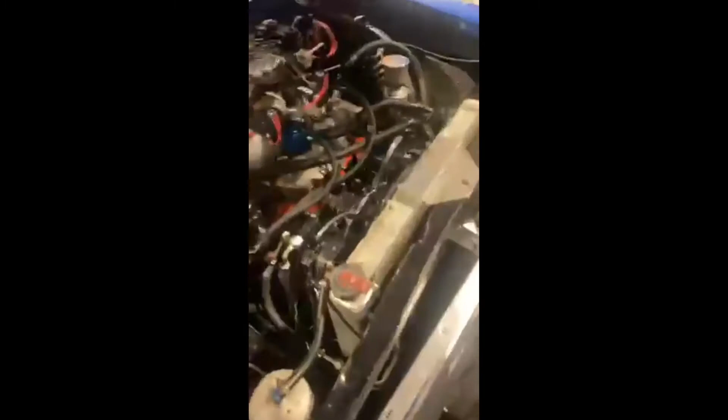All right, here's what we got going on, y'all. Everybody wants the queen to run on motor. They don't want the queen to turn the nitrous on. So we're gonna pull the nitrous kit off, and there's some kind of little aluminum spacer thing.

Brian, tell them what Gary Williams... y'all know Gary Williams, he's crazy as a bat, but he's got all these special reversion plates and stuff that he runs with his carburetor, and he swears by it, that you got to have the plate on it. We're getting ready to find out firsthand. We're gonna test this theory, and I'm betting with the old... what do you call him? Old roughnecker, that's what Gary Williams is. Old roughnecker, yeah. He definitely a carburetor man.

All right, we're gonna get ready, y'all. We're gonna put that little aluminum spacer on it. I'm gonna get it and show it to y'all, and we're gonna put it on there, and then we're gonna see what kind of difference it makes. Let me go out here and get it. Hey Smollian, grab me that little aluminum spacer and let's check it out. Let them see it. We're gonna see what kind of horsepower, that way you know.

This is what we got right here. Them ain't the brand new ones now. Where's that carburetor box? Bring that carburetor box in here. Do we got the carburetor box, y'all? I'm finna show y'all, hold on.

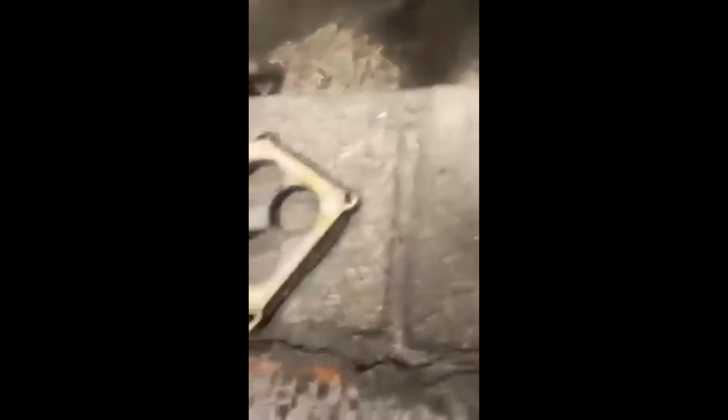Open it up, baby, see what it's saying, aluminum. Here's that little plate, y'all, that he's talking about. That's it, Gary Williams swears by it. We're getting ready to see what it's gonna do, y'all. Gary Williams trying to tell us, he's trying to say that it really makes a difference.

And y'all know me, your mouth will say anything. You tell me something, I'm gonna find out. Win, lose, or draw, we gonna know, and the whole world's getting ready to know if it's gonna make a difference.

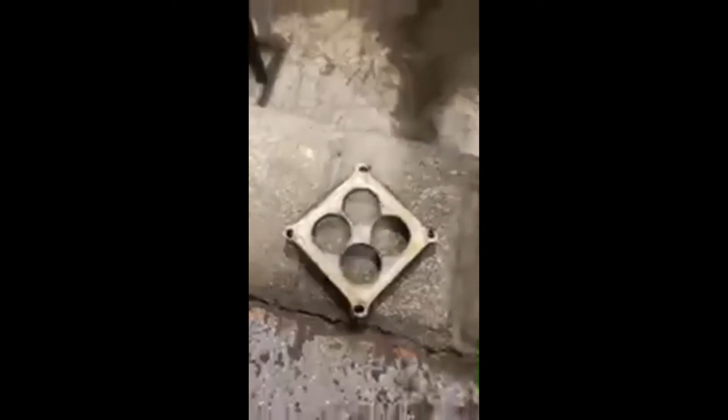So, what we got there? Ooh, got an E85 carburetor too, y'all.

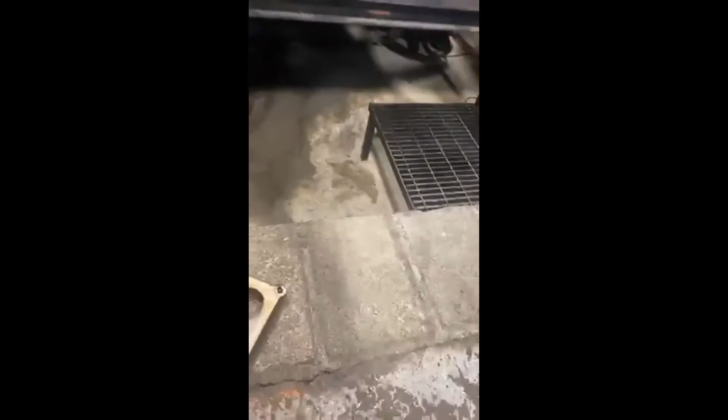All right, now I gotta be fair with him, I can't cheat, Mr. Gary. Which one will you need to use? Huh, Brian, come on, figure out which one we need to use.

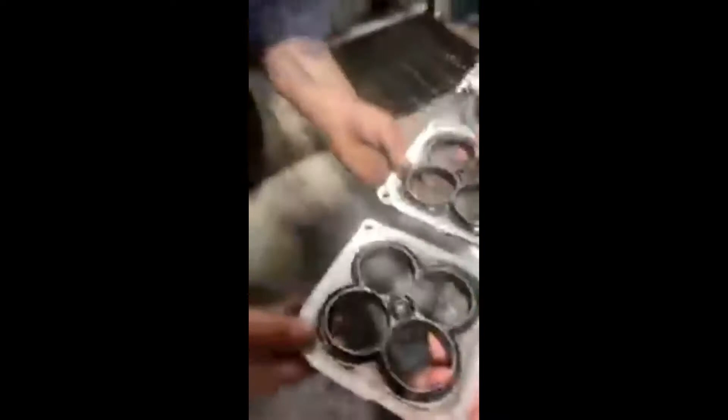One of them is for my 1200 carburetor that I bought from him. Did he give you one specifically for this carburetor? Yep, but I don't know what I did with it. They're identical that way, they're both reversions the same. Are they? Well check this, measure it like that.

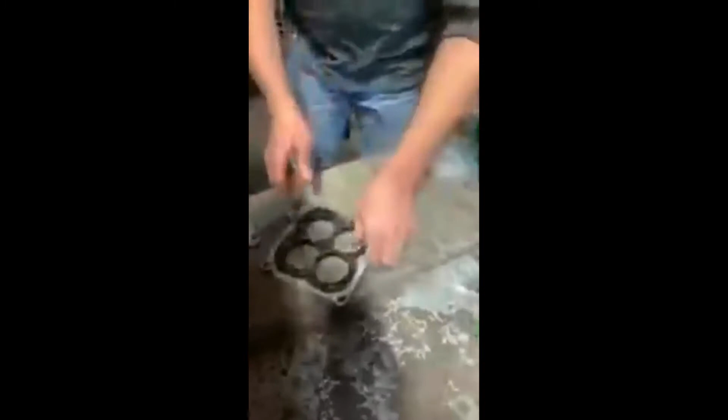Yeah, now normally Gary's got a second, there's two plates and they go together. What are you missing, Brian, the other one? No, that two-plate one. No, normally there's another piece. Smollian, I got some more plates somewhere. As in where? That's just one spacer, there should be two, there's more, another piece that goes with this.

These are the same, yeah, these are the bootleg ones y'all, I brought these from Memphis. Man, they must gonna leak. No, they don't leak. I got a pocket knife. No, I got a gasket scraper. So we'll use this one, it's a little more cleaner, yeah more clean, we need some Scotch-Brite.

All right, so that's what we're getting ready to do. This been hot, put that on there and see what it does, if it makes a difference. So we're gonna jump back on there and we're gonna dyno it, we're gonna take it.

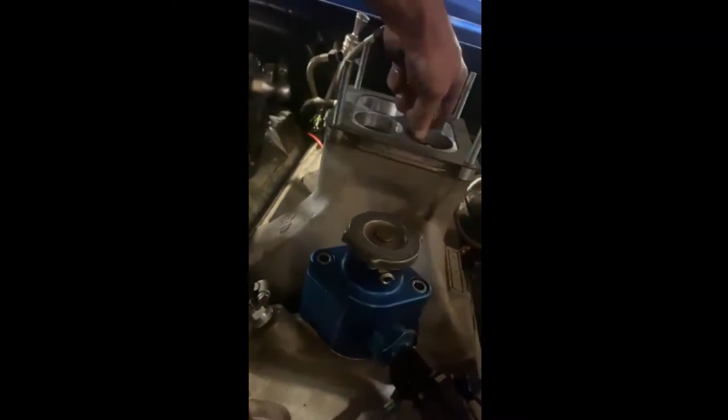We got Gary Williams' little reversion plate. It's a special made spacer he makes, billet aluminum. Supposed to help pick up the booster signal on the carburetor, make everything work better. If that works, we're gonna go take our ProCharger cars and put one on it, Axe. I think we can fit one on there. You'll get one on there regardless. A big one like what is it about?

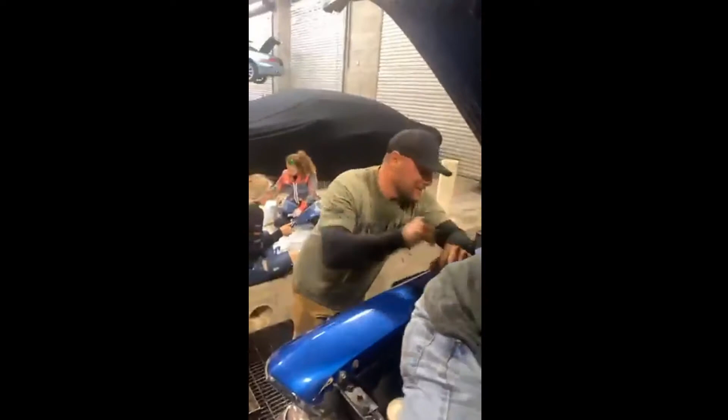Shit, if that makes a difference, we'll just go get a nut and put a nut on there. Put two of them on there, right? Yeah, we'll figure something out.

I dropped this one right there. What's going on, Brandon Lewis? What's going on, Hunter? What's going on, Stacy, Michael? Let me see that light. I dropped my one, I got it right here. What's going on, Jonathan? Brian Norville, we out here in Vegas tweaking on the little Chevy II. One there, it's my side. Oh, I'm not putting it over that carburetor. Yeah, let me put it there.

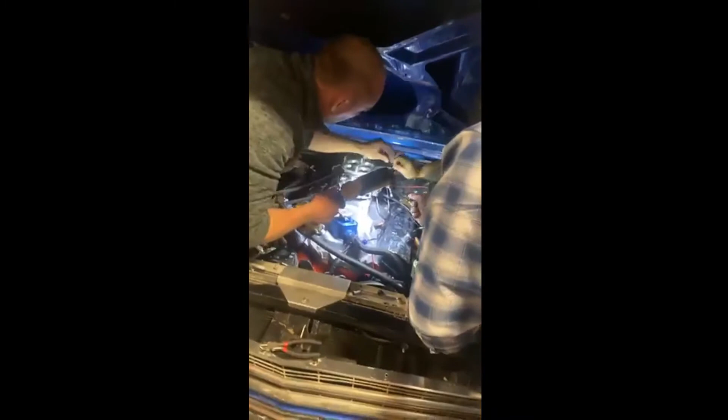You see, I couldn't even say it fast enough. I was like, might as well just react. Hey man, that wouldn't be no fun. I don't want to be that guy. You gotta dance with the devil every now and then.

Precious, look up here. She turns into an English bulldog at night. She gets in a race car, she turns into a queen, y'all. Axel, you don't think that's funny, do you?

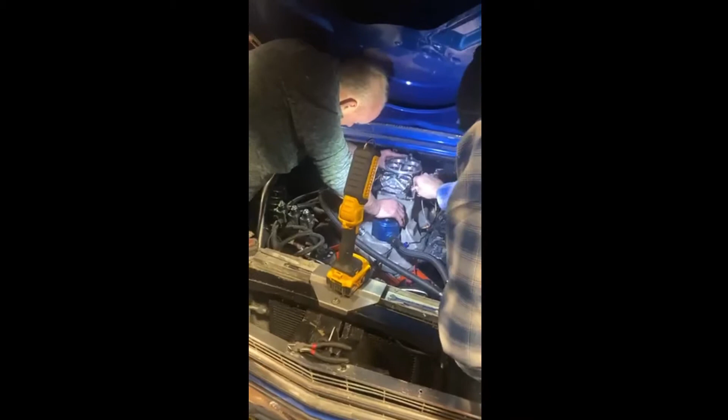Okay, we seeing what Gary Williams got going on. He's saying it makes a difference. Be careful of that down throttle, we fought with that down throttle. Need a clothes hanger on that.

Queen, when they get through, you need to get in there and make sure it's getting full throttle.

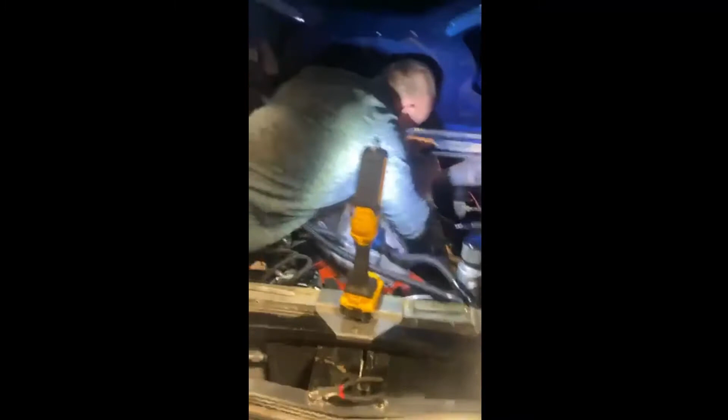Oh, I gotta have our hat. Here it is. What's going on, Jamie? Put this here. Rebecca? Kentucky? This a damn socket. What's going on, Mike? Keystone? Uh-oh, somebody calling.

Boy, if you bring that Trackhawk up here, we're going to take this Chevy II and gap it. You seen how much horsepower we made on the dyno? We ain't make but 575.

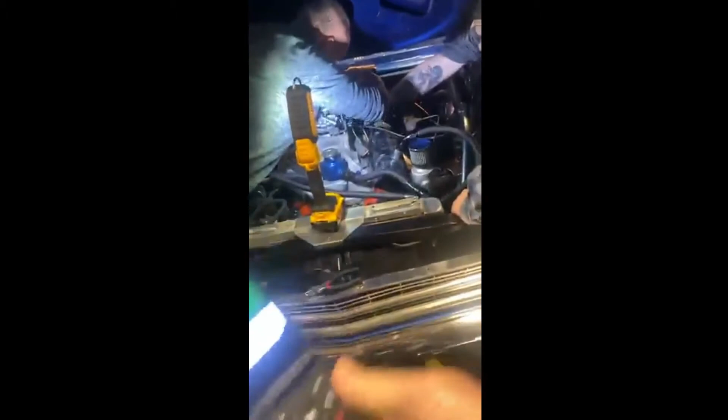So we get through here, we're gonna let Axe flag it. How you gonna flag it, Axe? Everybody gets 5, everybody gets 5. We're gonna run that track hawk, see if this 575 is gonna be able to do anything with that 900. What do you think, you got it on point? Yeah, I think we got her tuned up, man.

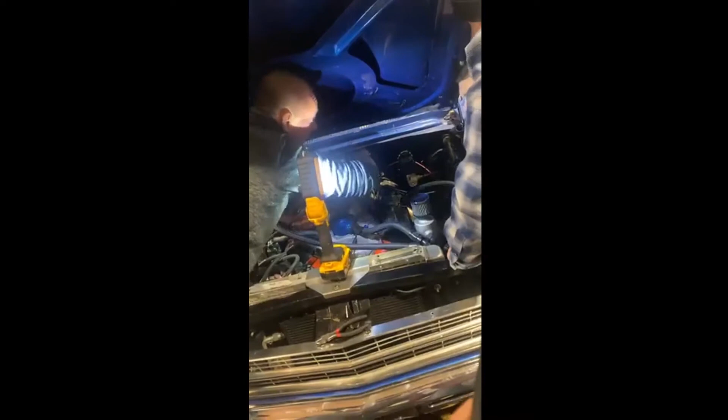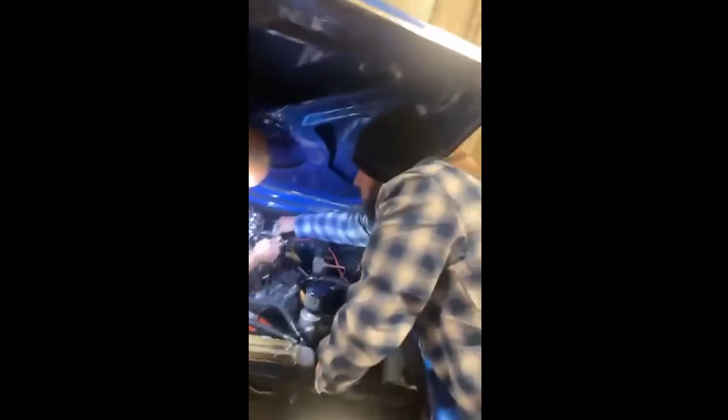Them boys in Texas, they've been working on the Trackhawk. They put it on E85, put a cam, headers or something else. And we've been here bootleg working on this Nova, so it's getting ready to be a drag race. Old school versus new school.

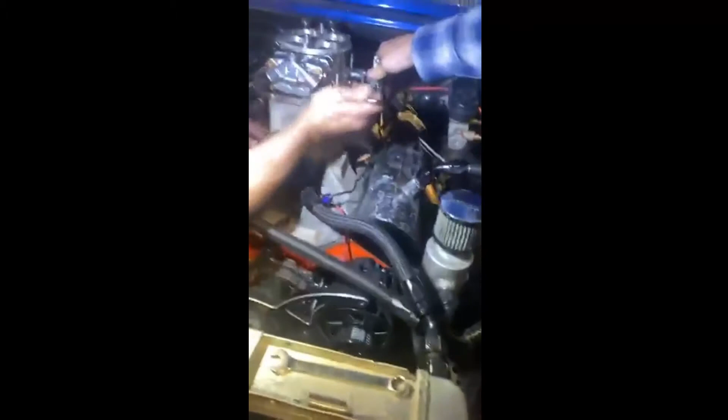If we lose, we're going to all dog pile Brian and Brett, they can't handle it. I got your back, Brian. We all, what's going on, Billy?

We'll stack up to a full size adult. That's right, me and Brett together, we make one person.

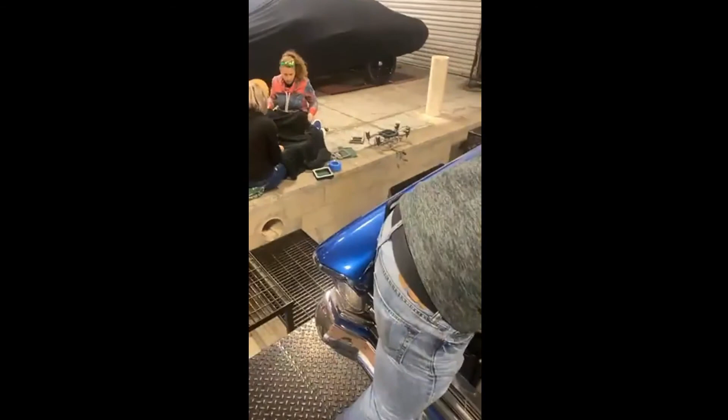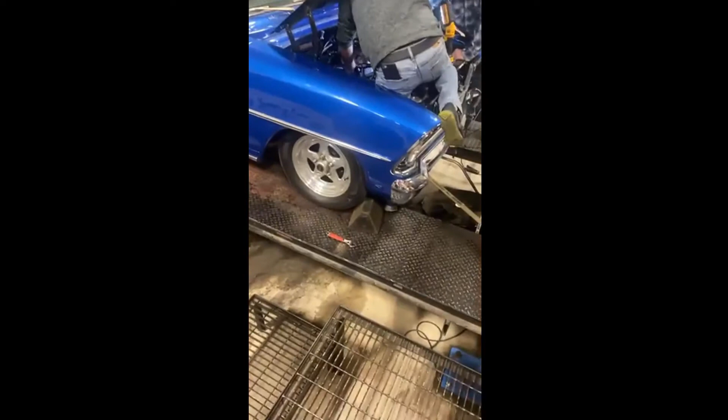What's up, George? Donald? What's going on, Joe? This was crazy. These weirdos.

Chelsea, come here. Come here, girl. Come here, Chelsea. That might not be Chelsea, or she'll try to eat the cans.

I don't know what Sassen got going on, y'all. Get ready to make a pull. Y'all just get ready, they getting paid by the hour.

All right, I'm going to let them finish it, then I'm going to jump back on here when we get back on the dyno. Here in just a few minutes, we're going to jump back on the dyno and see if the little spacer or whatever done the deal. I'm going to come back on in just a second, y'all. Rolling.

Here we go, y'all. We took the nitrous plate off and put the little spacer on there to see if it makes any difference. But in Gary Williams' defense, I think there might have been another spacer. We ain't for sure, but we're going to try this.

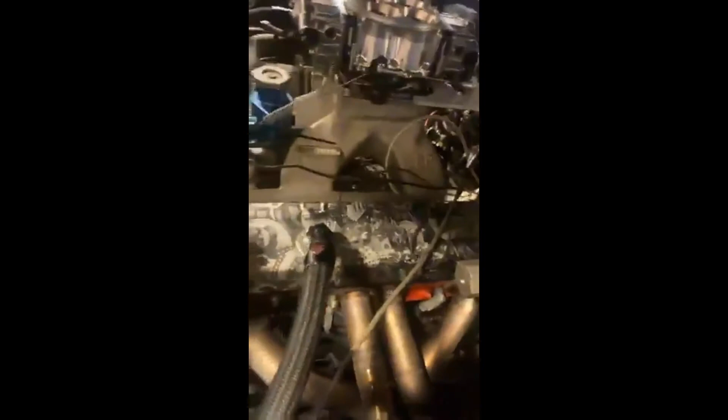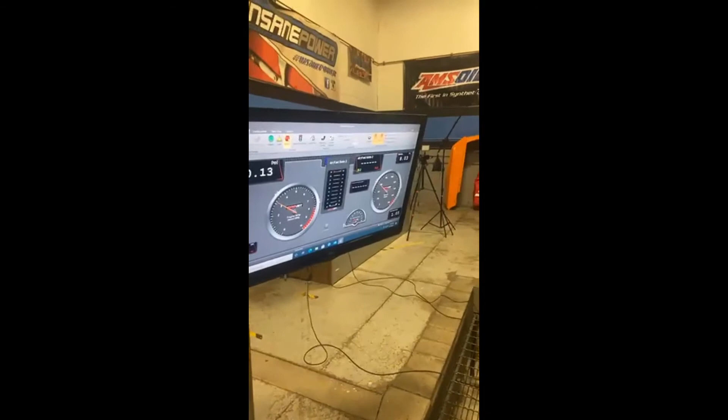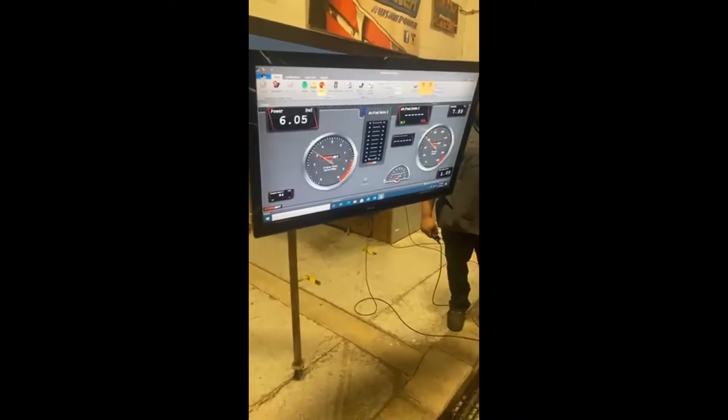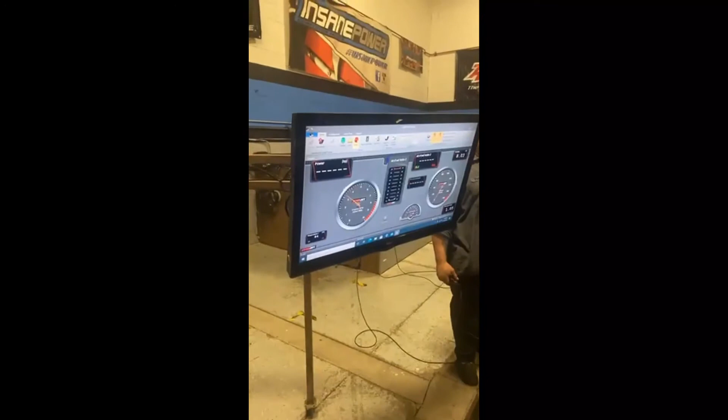Up a little bit. Here we go. Fix his hair. Here we go.

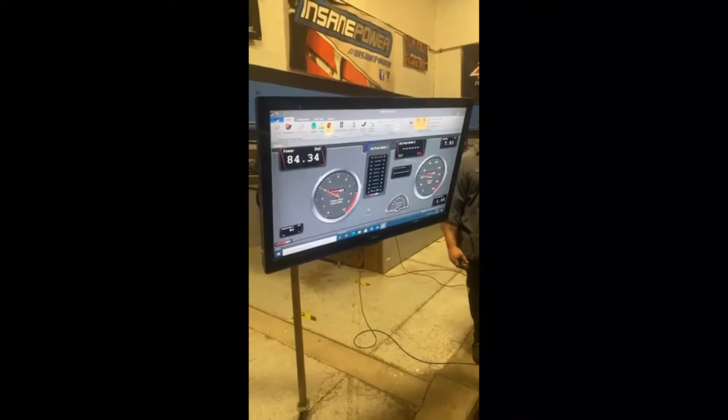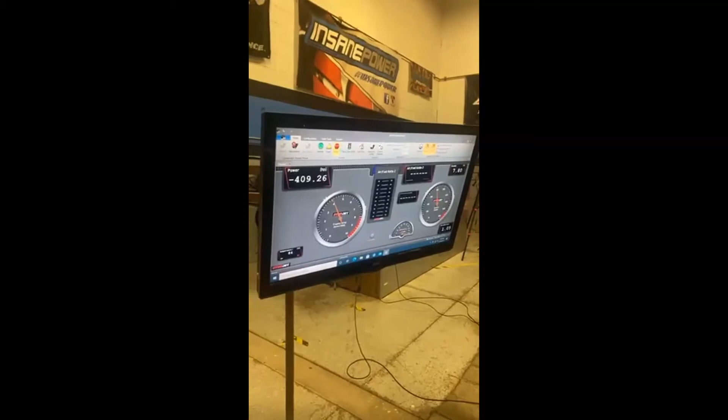Woo! That old crazy looking man knows something. He's a smart mouth joker, he's arrogant, he's an asshole, and he charges 3 prices. But I'm going to tell you what, it is what it is - I got to give him credit. 25 horsepower, just like that.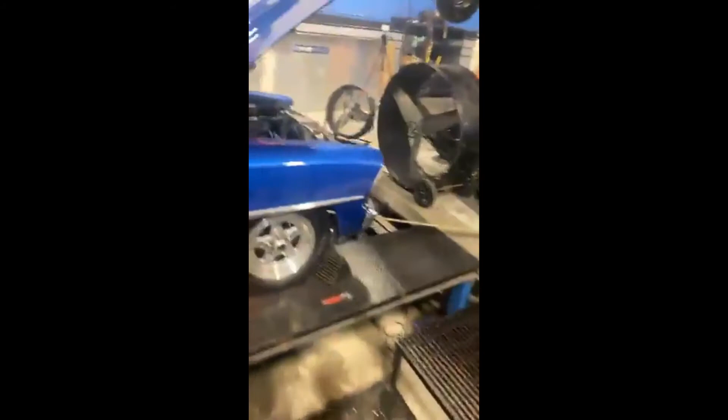That's what I said, he talks all that old trash. We put it to the test. Y'all seen it, all we done is we took the nitrous kit off and put a little old jack leg plate that he told us to put on there, and it picked up 25 horsepower.

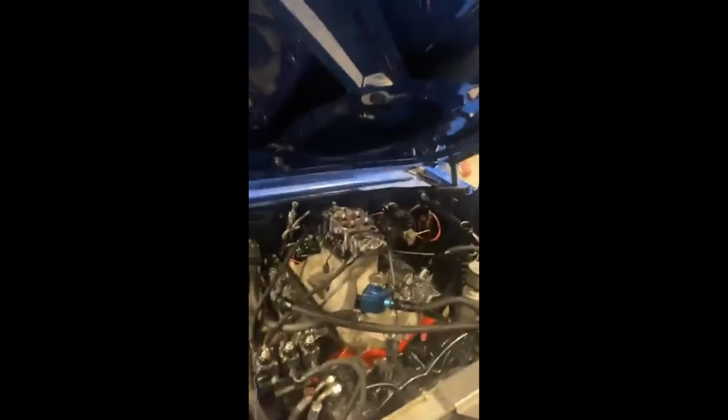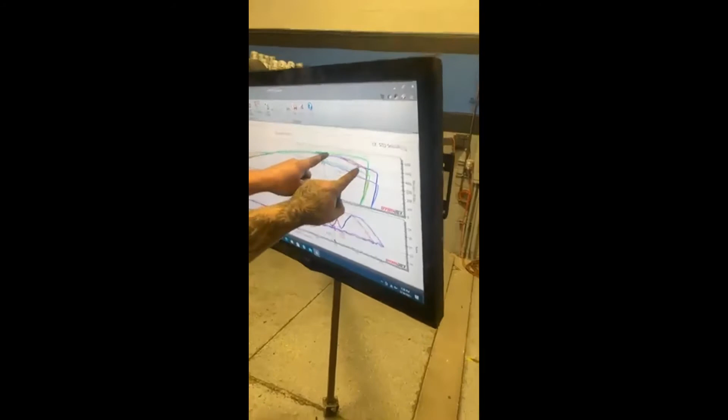There you go, what'd you say about it? Same great torque, but it straightened out the top immensely. Look at that, look how much it carried up top. Wait a minute, let's get the top. We're gonna go over here and see what you got going on. What do you say, Queen?

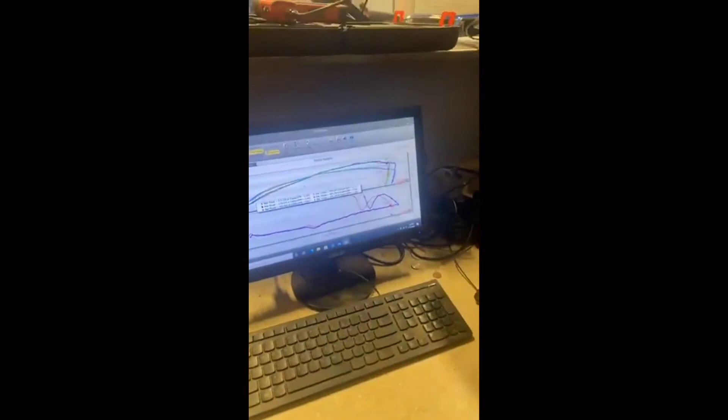Let's see what we're doing over here, y'all. So from right there to there, it liked the RPMs with that, didn't it? Now it likes the RPM, look at that. Brian, can you see that? What was it? Explain it to us for the people.

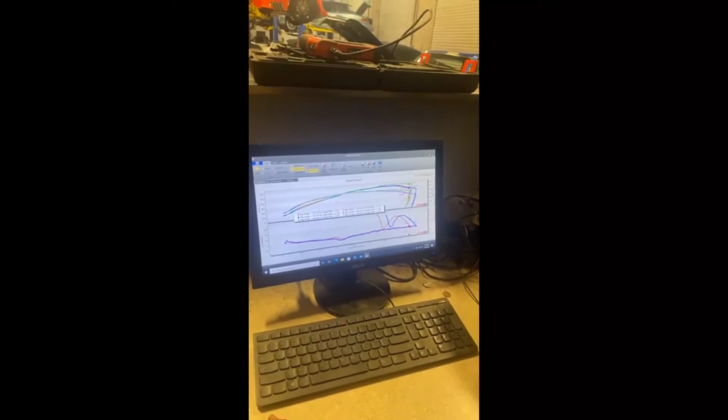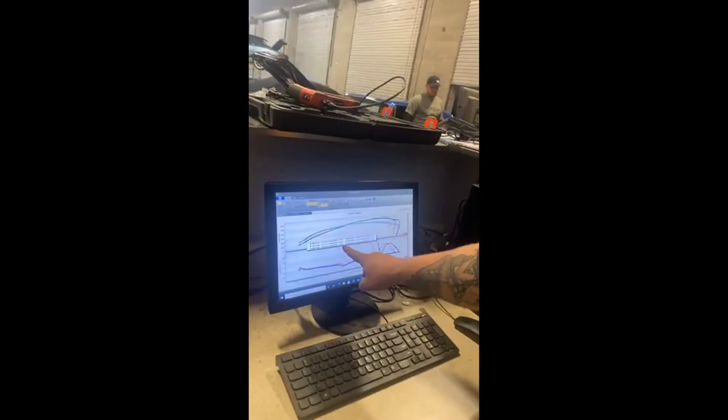We dropped from the green at this point, which was 586, right? At the same point down here on the red one, it was 483. That's 100 horsepower difference. From its power range at the top, it carried 100 horsepower more over on the RPM - usable power. It also picked up 500 RPM, made peak power at 500 more RPM and picked up 100 over the curve.

Explain to us what that means, in English, so poor people like me can understand. So the motor picked up RPM because the airstream's cleaned up because of the plate. We broke up the reversion and it gained almost 100 horsepower over the crest power number.

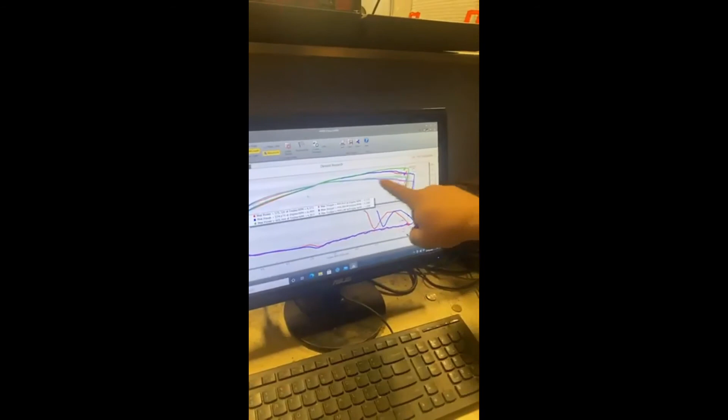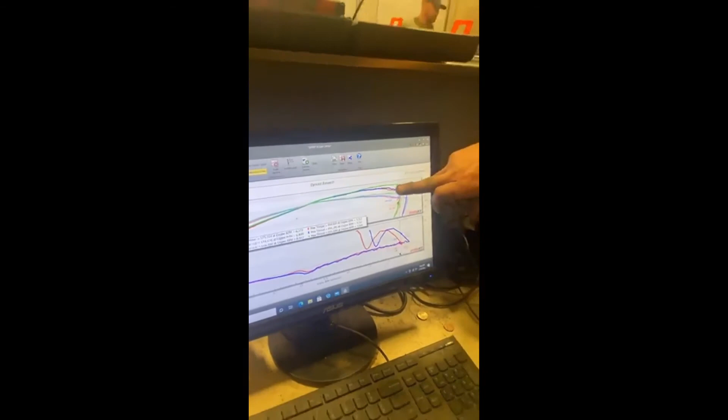So as you can see, the green line carried way over the other ones, right there - which means where the motor was falling off earlier. See where the motor fell way off back here? Look at it, it carried all the way up there, held it out 1,200 more RPM. So it pulled it, it liked it - yeah, it liked the RPM, 1,200 more. We need that second plate.

Me and Axeman got a theory - if one plate helps it 25, what do you say Axeman? We're going to cut a hole in the hood. Here's what we're going to do: cut a hole in the hood, put 4 of them on there.

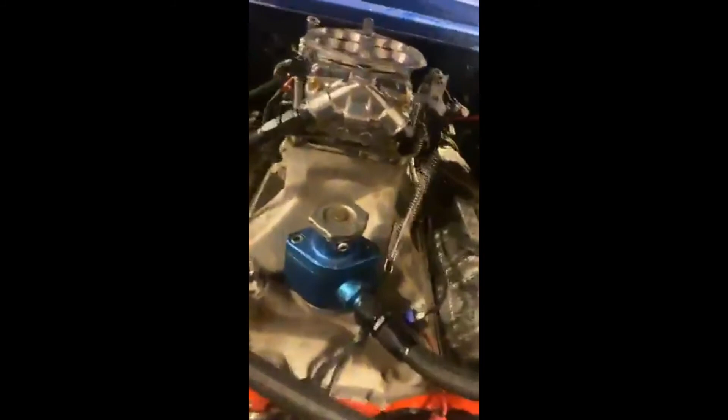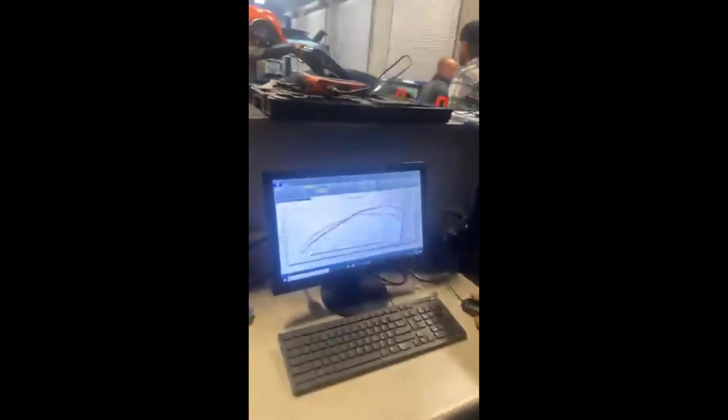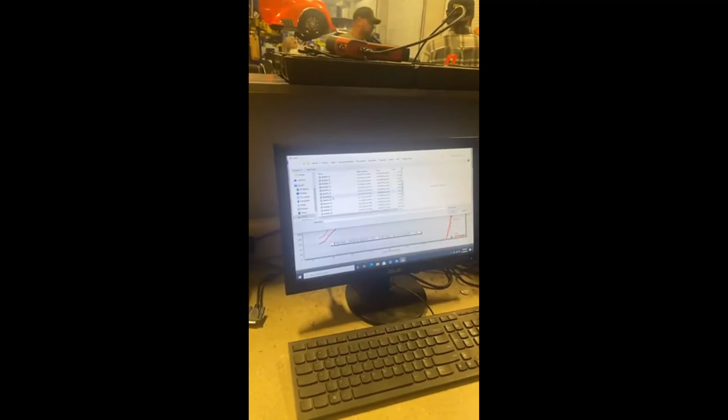What now? Hold on, let's get over and see what he's talking about. What you say now? All right, go back more. Hold on, let me close this one. Hold on, so here's the last run. Okay, and now we're gonna open this one. I think it's 38, that one.

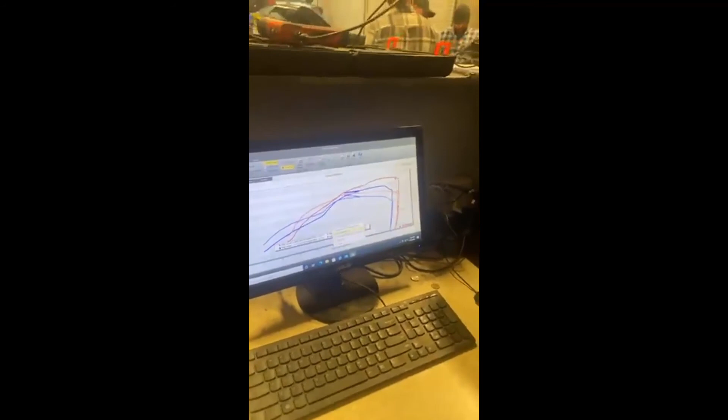There you go, see the difference? Break it down to us so the normal people at home can know. Let me make it real clear first, because you're talking mechanic monkey talk, I don't even know what you're talking about. Look at the difference, tell me what you're doing and what you mean. We went from 523 when you first rolled in to 606. We went from 489 torque to 495. We carried 1,200 more RPM over where it fell off.

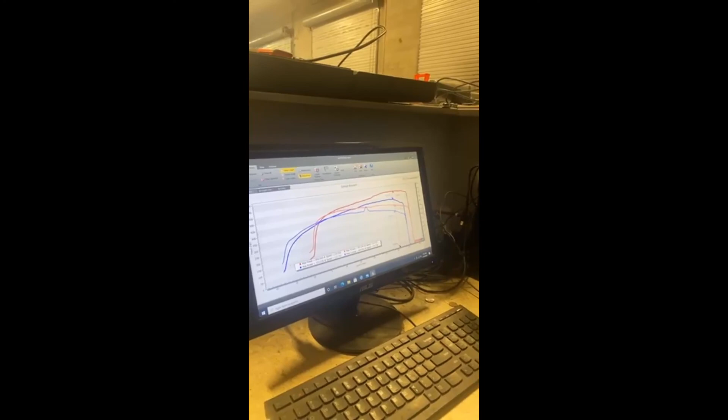That's where it fell off. We went from 516 to 602. There we go. Tell them, Queen, we're going to close the night out.